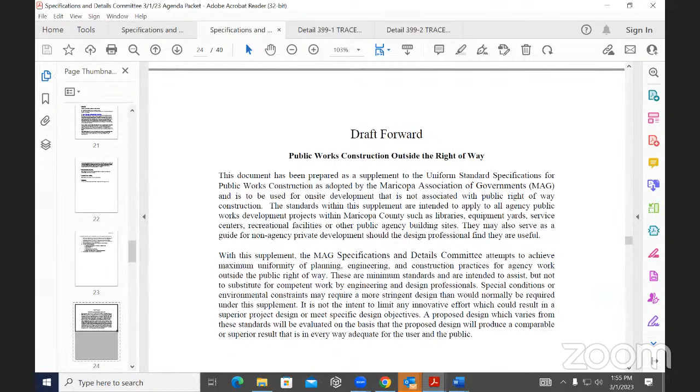Okay, one last comment this morning. Peter, when you're looking at that too in other agencies, ideally there are definitely some areas in MAG that we may want to develop in the future. Like right now we have no street lights or traffic signals, for example. I don't know if we wanted to preserve areas for those or not in the public rights of way and not use up those particular areas.

Just a thought—I think we have to realize there has to be opportunities for growth in the existing documents and recognize that has to be taken into consideration. We just added the landscape details and the new numbering system, so I think that's a good caveat to put on this.

Okay, well, that gives me some direction. I can put that together and we can carry cases forward without knowing what they're going to be numbered or lettered yet, but we at least know what they are. Great, thank you for all your efforts on that.

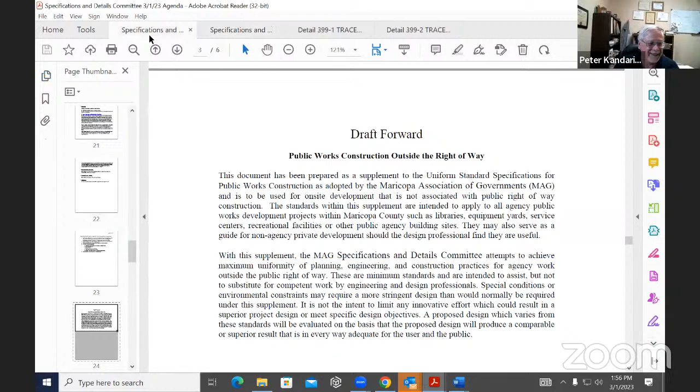Okay, very good. We'll go ahead and move on to agenda item number 5. These are items that are proposed to be heard and cases under consideration. Starting with case 22-15, add new subsection 718.4, solar reflective coatings, add reference in section 334.

This item is for information and discussion. Kelly, are you on the line? I know you're working with others in Phoenix—is there some discussion or any information you want to provide on this case today?

We don't have any new information. I know that Ryan forwarded out a memo we had on some discussion from last time that cleared up some of the issues we had with the solar reflective material. But we're definitely open for any new questions anyone has on the case.

So, members of the committee, are there additional questions that you have? Understanding that Kelly may need to go back and discuss with other city staff, but if we can provide those questions either now—happy to hear them now—or if there's other discussion on it, we can do that now. Otherwise, I'm sure Kelly would appreciate any.

With this in or out—I can't hear out of this. Is that right? Paul, I think you should be muted, you're picking up some noise. Thank you.

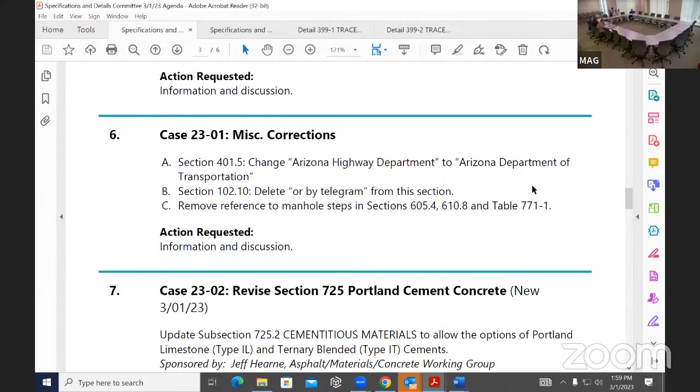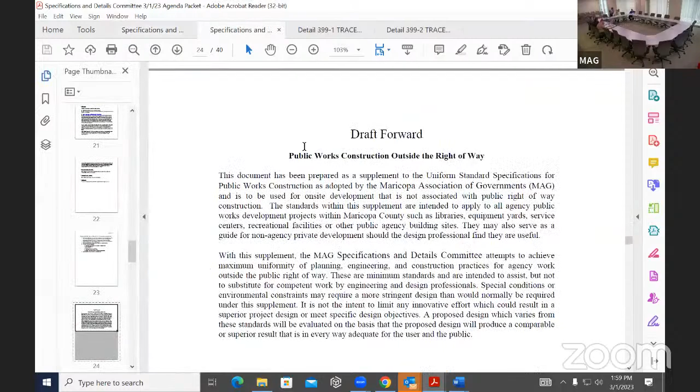Case 23-02, revised section 725, Portland Cement Concrete. We had a presentation previously, but this is our first meeting where this is a proposed case. So we'll go ahead and turn some time over to our group here—I think Alex, Jeff, and Greg—and they'll lead us in some information on this case.

Thank you, Mr. Chairman. You'll see in your packet the proposed language revisions, case 2302, the addition to 725, particularly 725.2, where we've added the 2 blended cements that we discussed and had the presentation on at the last standards meeting—Portland limestone cement and ternary blended cement—basically mirroring pretty much what the Portland Pozzolan cement that's already in there is. You can see that I also took one phrase off the end of that, where no other specific type is specified. I'm not even sure what that means.

I don't know that we need that any longer. You either specify the type or you don't. Now that we're going to add some other potential blended cements on there, we should probably take that off so that we can make sure everyone knows exactly what they're using in their mixes.

At the working group meeting on the 16th of last month, I stumbled through, to the best of my ability, the presentation that was made at the last standards committee meeting—slides and so on that we had. There were really no questions or concerns or discussion about it at the standards committee meeting. Nobody seemed to want to do that, so after the presentation, we moved on.

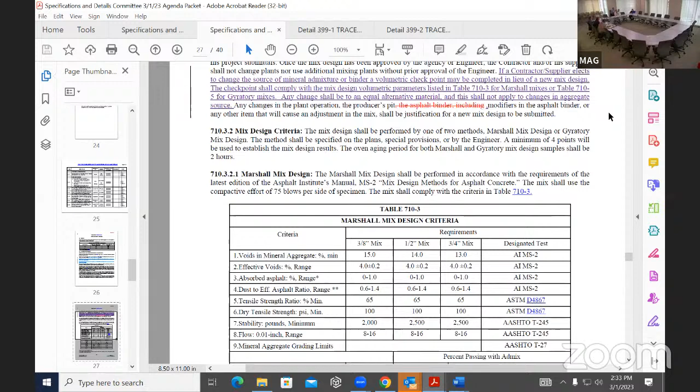Okay, I know I haven't had a chance to talk with anyone at the City of Mesa. We have a pavement manager who I'm sure will be very interested in it, so I'll go back and get some feedback. I might have some different comments at a later time, and I encourage all the committee members to do the same, go back and talk to the other staff and have that reviewed.

All right, let's move on to agenda item number 9, case 23-04, revised section 714 microsurfacing and 715 slurry seal. Again, this is a new case being proposed. This is our first month where we have this case on our agenda, so we'll go ahead and hear the presentation on this.

And it sounds like, Alex, are you taking this one? Section 714 and 715 are slurry seal materials. One of the issues we've been having—I guess I should drop back and say, back in 2021...

Specifically, table 714.1 and 715.1, there was an additional column added that added production tolerances, and then an additional note was added to the table also. So as happens periodically when we make these changes, we don't always envision how that actually works in the field. Now we're finding there are problems in the field with these tight production tolerances. So the proposal is to basically go back to the way the standard used to be and remove those production tolerances back out of the tables.

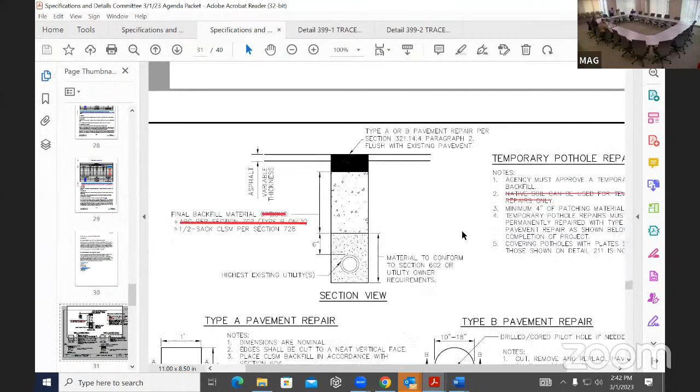Yes, sir. Gordon is rolling through the brief description and then the proposed updating of MAG detail 212. If you can scroll up a little bit, I've written a little description there of why these recommendations are being presented after discussion with the MAG Water and Sewer Committee that we had last year and into this year.

I would say the biggest challenge we've been encountering is when we're asked how we're going to be backfilling a pothole. If it's with native, the questions have been coming back: how do you get compaction testing? And you can't do compaction testing in an 8-inch, 10-inch, 12-inch, 16-inch, even a 24-inch hole. If you want to do accurate compaction testing, you have to basically excavate a 36 by 36-inch excavation.

And if it's over 4 foot deep, then you have to shore it. And in these applications where we're potholing for either construction or design, and it's not known if those holes will ever be reopened, the agencies are wanting to have half-sack slurry. So with that being the case, the recommendation is that the material used for final backfill would be the half-sack slurry, so that we can eliminate the concerns of sinking potholes and not have to deal with coming up with solutions when we can't do the compaction testing.

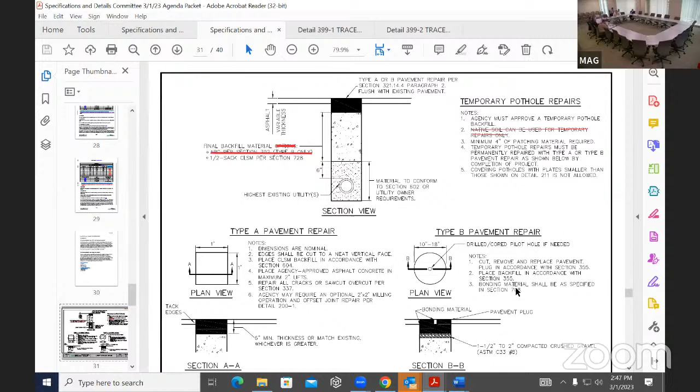So Arvid, on the temporary pothole repairs where note number 2 is struck out, native soil can be used for temporary repairs only. You mentioned a flowable fill. I didn't note right offhand where it calls out flowable fill in this detail. It doesn't, Mr. Chairman, and if you can scroll back up again, Gordon, for us. So I felt, working with various agencies, it was better just to leave that to note 1 that says it's up to the agency to determine what temporary backfill is acceptable, because every project is going to be different.

If it's a situation where it's a design project and we don't know if this alignment is going to be approved or not, then most agencies are saying, fill it with half-sack slurry because you're probably going to move the alignment anyway, and I don't want to take a chance, and I don't even know if this project's going to go to construction. If it's potholing for a situation where you're going to be crossing with trenchless, we have a project in downtown Phoenix right now where we went in 3 weeks ago and potholed 7 utilities we're crossing that parallel the light rail on Van Buren and Central.

And when we met with the inspector and all the agencies and explained, we're going to pothole all these utilities, we're going to backfill them with native and cold patch them because we're going to need to reopen each of them again when we do the actual trenchless installation.

But then once the trenchless installation is complete, we'll come back in and do the half-sack slurry and the permanent replacement of the coupon. The inspector said, I approve that because I don't want you trying to make another hole and trying to go through the half-sack slurry and risk damaging. So the reason for striking the native is because we felt it was better to leave it completely in your lap as an agency to determine on the circumstance what you will define as temporary based on the situation.

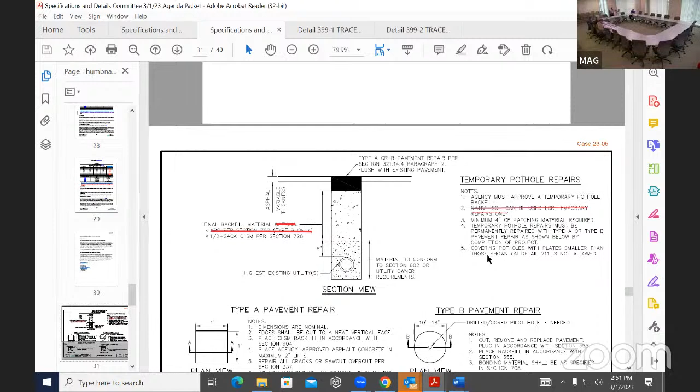Yeah, when I first read note 1, I missed the backfill word. I just saw agency must approve a temporary pothole. Oh, okay. Yeah. I was like, shouldn't we also approve the backfill material? But that's what it already says. Okay. Yeah. All right. Hey, Arvid, this is Warren. Yeah. I'm sorry. Hey, this is Warren.

Just a thought on that now that I'm thinking about that, and what Ryan was saying is maybe just a little more description in that note 1. And the reason why we're saying that agency must approve that temporary pothole backfill is because situations vary, as you've described, right? So maybe that would help clarify when someone's looking at this what the intent is with that. You know, obviously we have to approve it, but it's because of those different situations, right?

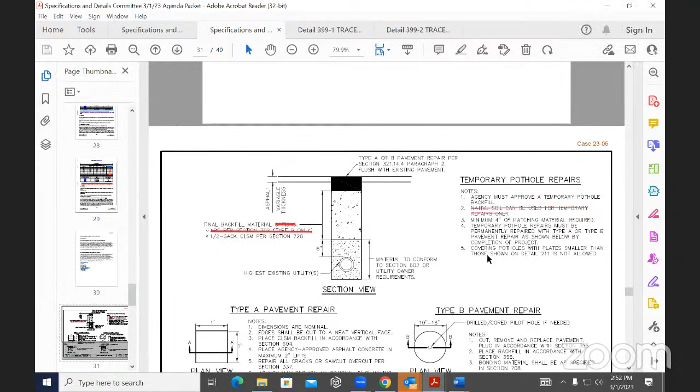Sure. So what if we said agency must approve the temporary backfill material due to varying situations? I don't know. I'm just throwing that out. No, yeah, I'm just looking at note 1 and asking if we just changed up the wording, is there a different way to word it that you feel would be better understood and received?

And while you're thinking about that, the way that the temporary pothole repair notes are listed is it starts with, in this case, agency must approve the backfill material of a temporary pothole. Number 2 would be a minimum of 4 inches of patching material is required. Number 3, temporary pothole repairs must be permanently repaired with a type A or B pavement repair as shown below by the completion of the project.

And then number 4, covering the potholes with plates smaller than those shown in detail 211 is not allowed. And that has to do with the pothole plates that were used that would be sucked out of the hole. If they're gonna use plates, which is another alternative, they're typically milled in, and they're typically 4x6 plates now to make sure that there's not a chance of them coming out, especially if they're there for long term. So the logic behind the temporary pothole repair notes is that it's basically a sequence of how things get done.

But ultimately, we want to make sure that you as the agencies bless the temporary backfill material, because based on the circumstance, like you said, Warren, it might be that you say, no, I want half sack, or it might be, yeah, I understand the situation. You're going to be reopening this 2 or 3 times. Let's do dirt with cold patch and monitor it, or maybe you say, let's do a steel plate over each hole so that we can just pull the plate and not have to worry about sucking out the hole every time and then re-backfilling it. So that's where, again, I'm trying to put as much of the decision making in your court based on the situation.

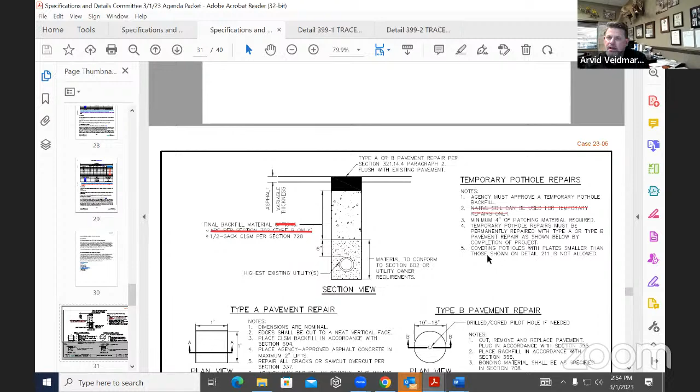Warren, was there more on that you wanted to talk about? No, that definitely covers it. Thank you, Arvid. Thank you, Ryan. You're welcome. Okay, any other questions or comments on this case? Yeah, Mr. Chairman, one quick comment.

So yeah, I like the elimination of the native, because we had an example of this where we did some design potholes, and then it was almost a year later, and we're out there having to do a permanent because they were failing. And the contractor was arguing that he used AB, and we said, well, we don't know. Is it native? We thought you used native. And so it was a debate.

And so we ended up sucking it out anyways. And so by eliminating that, then for sure it's a reasonable fill or permanent fill. So that'll help, because these design potholes can linger and you don't know what happened. Okay, thank you for the additional feedback, Jim. So yeah, that's just another reason why we're doing this. So thank you, Arvid. Yeah, you're welcome.

And as I read it through my head, I think I'm going to just throw this out there. Agency must approve temporary pothole backfilling material. I think that might be the language that we should throw on the table and see what people think of that. Do we define anywhere what temporary means? We don't in this,

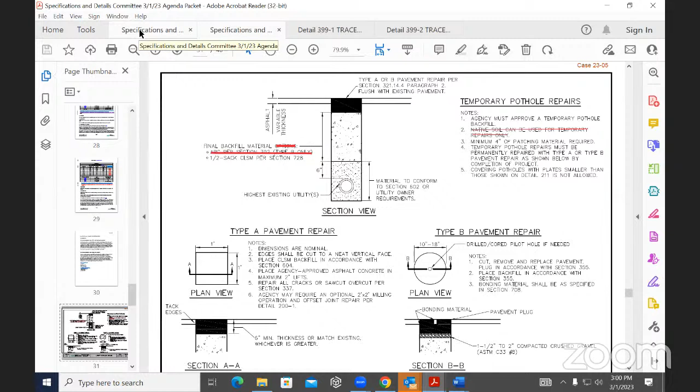Okay. So it's just an idea for you as the agencies to look at your processes by which you authorize or permit potholing. If there was more of a uniformity across that, then it would be more standard that the responsibility to prove that the hole is permanently backfilled properly, when there's money tied to it, contractors are going to pay a lot more attention.

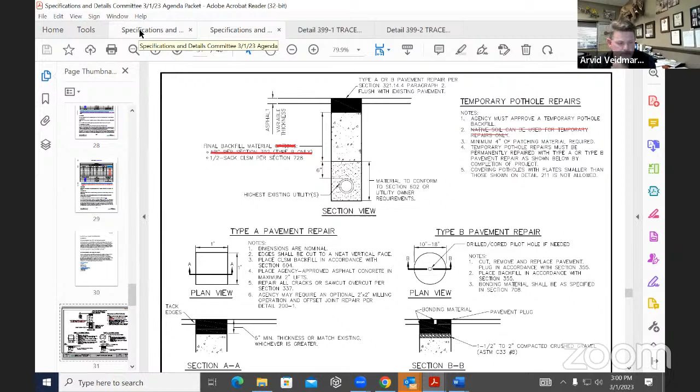Okay, thank you everyone for the comments on the case there. Arvid, thank you for your hard work on that. My pleasure.

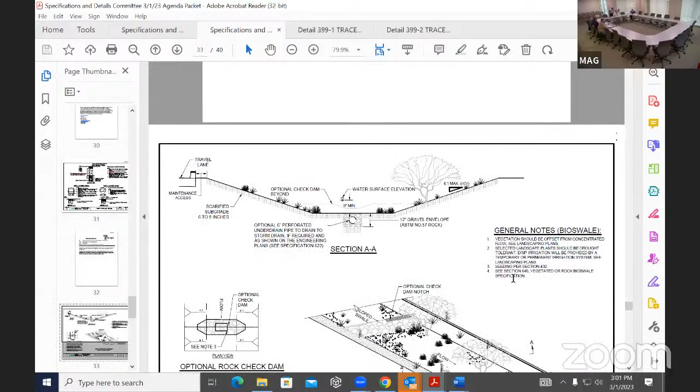We'll go ahead and move on here to our next agenda item, which is item 11, case number 23-06, vegetated or rock bioswales. Again, this is a new case being presented this month for the first time. And this is one of the details we had alluded to earlier as we're talking about the outside of the right-of-way details and specifications, or our supplemental details and specifications. And so this one looks like it's sponsored by Bashir and Peter Kandaris. So I'm not sure who wants to present this. Hey, this is Bashir. Today, Eric is also here, and he would be presenting on behalf of the city. Well, thank you, Bashir. Go ahead, Eric.

Hello there, folks. The vegetated or rock bioswale is a detail that folks might know is from the Greater Phoenix LID handbook that's been reviewed and dissected a bit and updated within Peter Kandaris's outside of right-of-way group. And the intent here, it's a bioswale, with vegetation or rock. So in the end, it's a swale. So stormwater flows into it. It flows generally from one side or from one direction to another, as swales typically do.

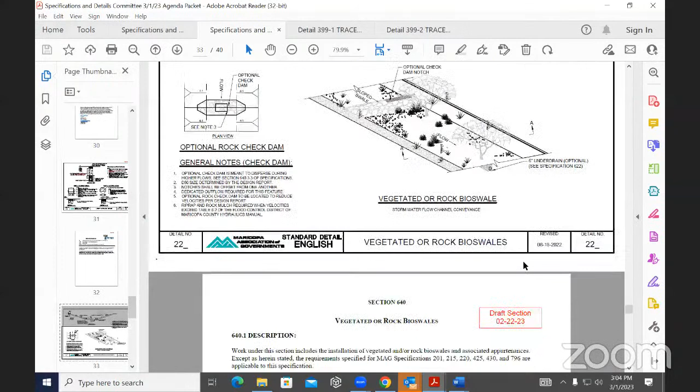And we've recently had the use of one of these here in the City of Tempe, as well as a number in ASU, and these are used throughout the country in varying forms. So there is a set of specifications that go along with this, and they're presented there below. If you guys have had time to take a look, go ahead and let us know if there's any kind of questions or concerns or comments, and we can address them.

Okay, I've got a few comments, but I'd like to open it up to the committee first, if there's anyone else that has questions or comments. I had a question on the detail. It refers to section 640.3.3 of the spec. So if this is going in outside right-of-way, is this referring back to the section of our specs in the right-of-way? So are we mixing and matching here?

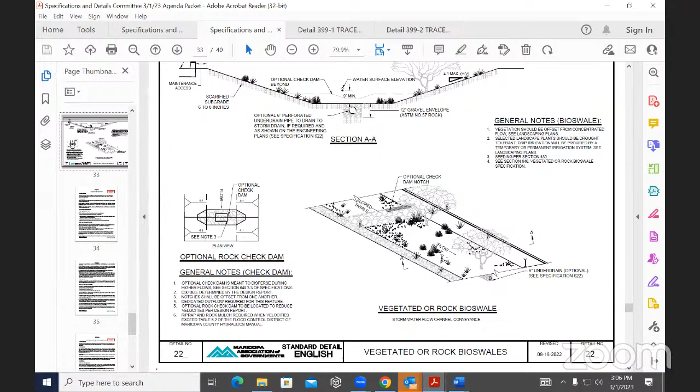Yeah, it's a good question there. Obviously, our discussion here earlier in this meeting hasn't been the first time that that was discussed. If you scroll down just a little bit, it's a 22-whatever on the detail number. So there's a question there on what these items are going to be labeled. And the section 640 there is the current specification. So these are new sections. These are not in the existing MAG.

This is the numbering problem we're coming up with. We threw numbers in because we had to reference it for right now. But this is a brand new section. This doesn't exist in the existing MAG. So as we develop and understand how we're going to do numbering, we'll change the number around to fit the new outside right-of-way types. But yeah, this is not an existing MAG spec we are referencing.

That's right, I think we stopped at 631 or something like that. Yeah, you'll see two new sections in here. They do reference back to existing mag materials. The attempt was to not create new or duplicate specifications, so you'll see it reference a filter blanket material, and the landscape materials before the geotextiles. Those are all existing sections. So part of this is going to be the challenge of figuring out how we number these ones that still reference back to the other existing standards.

Yeah, that is a challenge, Peter. Obviously there are certain products and methods that can go in both the right of way and on site, but some really are only applicable to on site. Even that perforated pipe, something like that, maybe it is traffic rated or whatever, but maybe it's not. So things like that, we have to be careful of what we make universal.

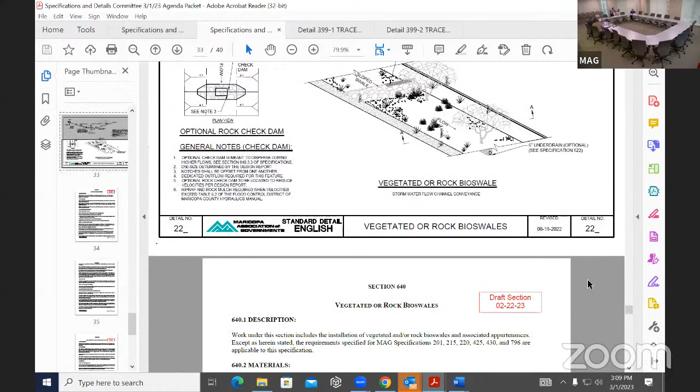There is some existing mag specifications on the detail that it refers to, like for the landscaping or seeding, 430. So just like on this draft specification, it probably should refer to the mag specifications or some way to know that it's referring back to the main blue book and not the supplement book. As we develop this, we're going to have to come up with, maybe we'll be using that term instead of mag specification, mag supplement specification 1-640 or however we're going to do that.

So one of the concerns I've had in the past about adding a lot of details to the mag specifications and details, especially when it comes to some of these details associated with low impact development, is not that I don't like the detail, but a lot of times these details have a lot of information which I feel are site specific or design specific. So like looking at this particular detail for vegetated or rock bioswales, I look at things like the 9-inch minimum water surface elevation depth, and I'm not sure I know why it has to be 9 inches. Why can't it be 6 inches or 3 inches? Wouldn't that depend on my site? Wouldn't it depend on the drainage area or how big of an area I have available?

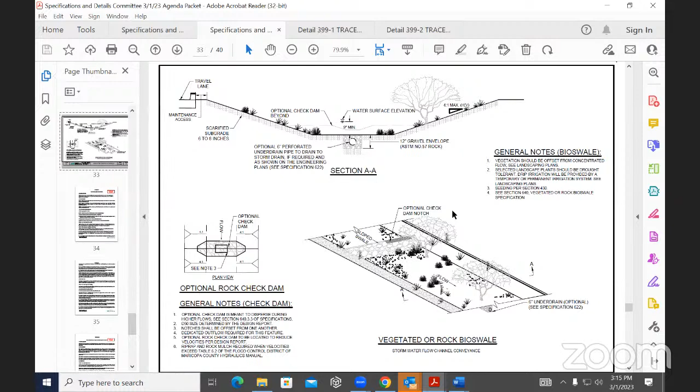Any other comments from committee members on this? You make a good point, Ryan, especially if some of these details are used by the development community. They always try to make things fit on their site, and they're sometimes very unique in what they do. Yeah, and especially a detail like this, there's no reason it has to be straight. Obviously it could meander - that's why there's no dimensioning shown on this, because there's no standard dimension to something like this.

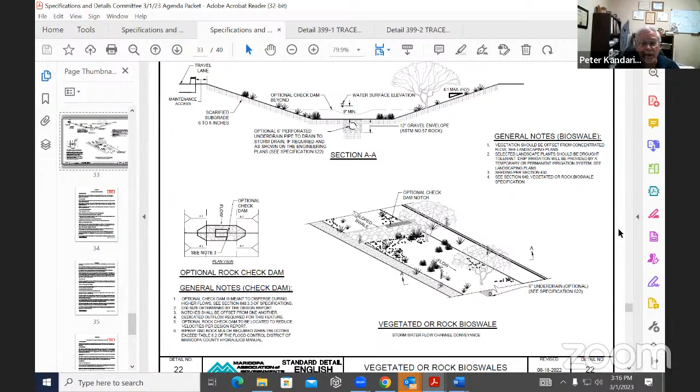So I think we appreciate - this is why we wanted to get one of these in front of everybody, to start broadening the perspective of what we've been looking at versus what you're thinking of in terms of other standards and how we need to approach this. We needed to get one of these out here so we can start the process. The same goes with the language in the sections that were developed. We need the feedback as much as anything else.

Hey, Peter, maybe along those same lines in that narrative up front, you could have some description of these details - something like some of these are specifically truly construction details, and some of them are somewhat of a hybrid between a construction detail and a guideline or a typical. Something like that might be helpful too. So I'm writing down what you're saying right away. I like some of the discussion here.

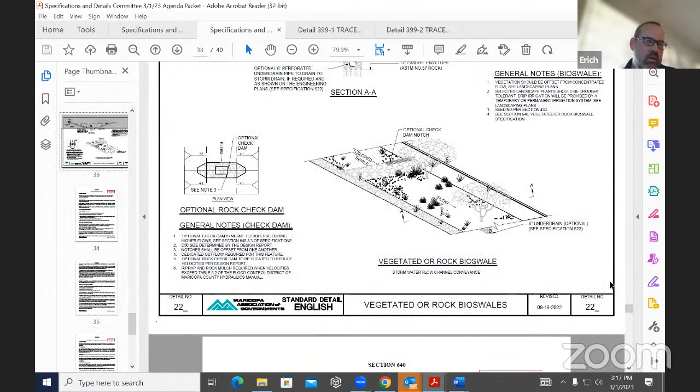Okay, anything else on this one? Yeah, just a little additional discussion on this. So with these details, this one in particular and other LID details, it lends to what you're saying - kind of standardizing what each type of low impact development detail is and the types of uses.

So this one's called a bioswale. One of the interesting comments that came from our engineer who was utilizing this was - they were initially trying to install a retention area, and they said, well, what does it matter what we call it? Is it a bioswale or is it a retention area? So one more use of these is to help inform the engineers and designers of the proper use and terminology of these low impact development facilities. So there's more dialogue there.

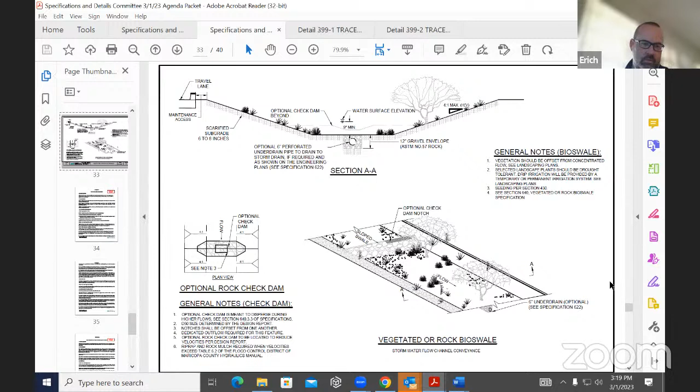Okay, thank you for the additional comments there. If there's nothing else, we'll go ahead and continue on in our agenda. That takes us to agenda item number 12, potential new cases for 2023. We often hear about these in our working group reports, but if there's any other potential new cases that won't be part of working group reports, let's go ahead and hear those now, if anyone has one they'd like to bring up.

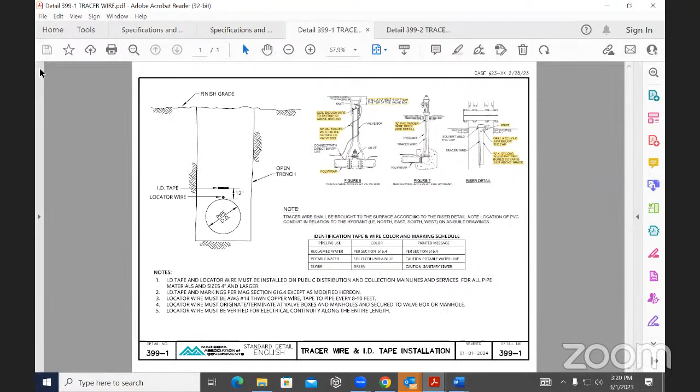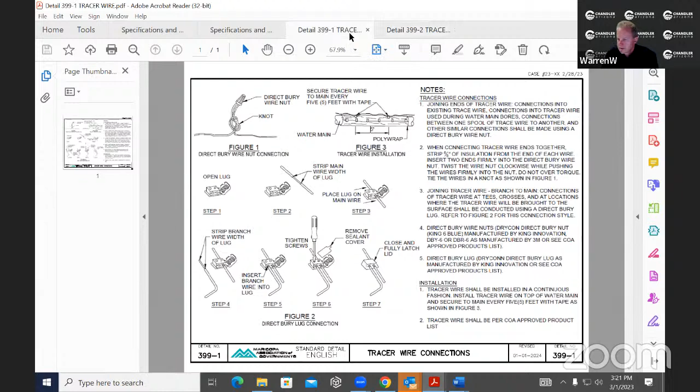Okay Warren, are you going to? Yeah, I just wanted to share the current direction for this case that we can submit now, or I can submit a more official case coming in April. Based on our discussion at water and sewer, it sounded like we wanted to expand this a little bit to include not just the trench, locator wire, and tape, but maybe also some scenarios about how to address the tracer wire and the valve box, fire hydrants, riser detail, and then also a page 2 that would show the wire connections themselves. I know in Chandler our details do have the page 1 scenarios for manholes as well, but we don't have anything like this for the tracer wire connections. So I just thought I'd open it up to the group if there's any other supplements you have out there, or anything else you think would make sense to incorporate into this case that might help. Let me know if you have any supplements or details, but that's the current direction and if this seems like the right way to go for this case, that's kind of where we're at now.

Okay, thank you. And Warren, when do you think you're going to present this case? Like I said, we can make it an official case today, but officially I'll put it together in a memo by the April meeting.

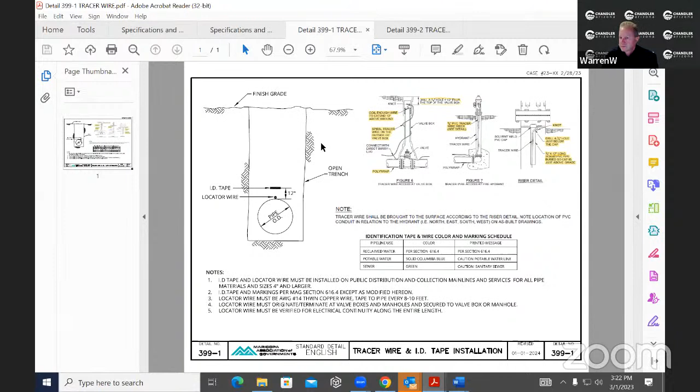Okay, fantastic. Is this tracer wire and ID tape installation specific to PVC water lines or anything in particular? Any material - it applies for any material, any pipe materials. Okay, alright, thank you. We'll look forward to seeing that case and hearing more about it at our coming April meeting.

Okay, thank you Ryan. Okay, let's go to agenda item number 13, our working group reports. We'll go in the order listed here and start with our water and sewer working group. Jim, as the chair, do you want to take us through that? Yeah, thanks Mr. Chairman, so we met on Tuesday, February 21st.

It was virtual and in person - it was just me and Gordon hanging out, but it was a good meeting. We covered some of the items that were already discussed today, so I'm not going to go into detail. We didn't have any suggestions for miscellaneous corrections.

We talked about detail 212 that Arvid worked on, so you see the results of that he discussed earlier. We had an update on the PEX-A pipe materials - this may be a future case here, hopefully this year, about submitting an alternate to copper services using PEX, which is used pretty much exclusively now, or most commonly used on the private side. So there's a few things to hammer out on that. One of the things is traceability of it, so I'd like to see a component that makes it traceable.

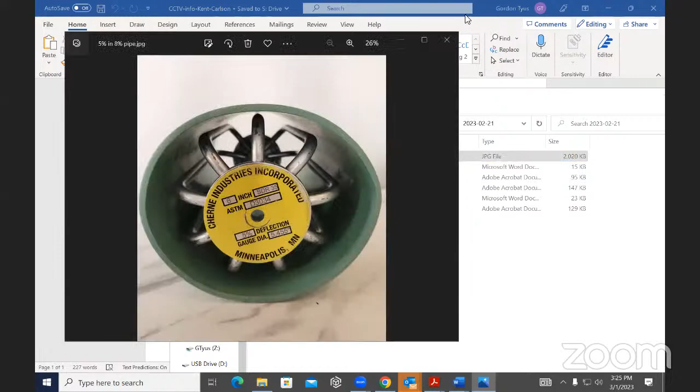So the summary, just to summarize quickly, is that it looks like the current mandrels in the industry are not measuring 5%. It could be closer to 7 to 10%. So that's why we're looking into that further. And he kind of got into, there you go, there's kind of the science of this.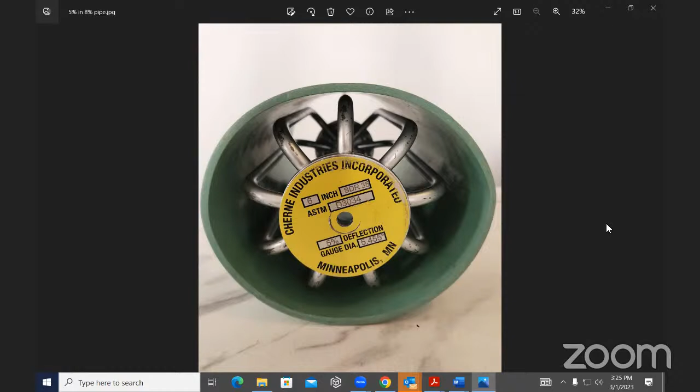There's discussion about the legs, I guess they call it, you get into the science of, not geography, what do you call it? Geometrics of a circle versus this. And technically this is not a true circle, especially when you got odd numbered legs.

As you can see, the top fin, and then you go straight down from it, and then you got it split to two. So you got a triangle there, and that triangle does not match the nominal dimension of the mandrel. So it was very eye-opening.

So again, like in modern science, more data points on anything is good, and so it turns out that a mandrel with more legs, an even number, say like 18, is going to give you a lot more accuracy when you mandrel a pipe.

So we're going to try to expand this and maybe come up with a spec that might change the type of mandrel we're using currently, because it was obvious, at least from what he presented to us, that the current mandrels are not measuring the 5%. They're passing right through, if your pipe is deflected like what you see there.